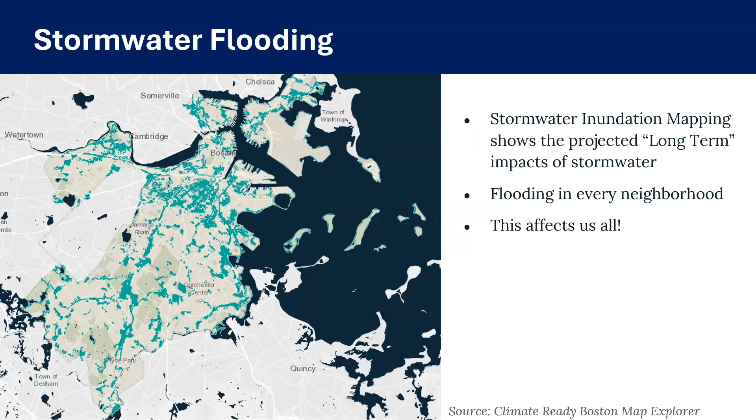So thankfully, we have green infrastructure to help us with some of those water quantity and water quality issues. So for the purposes of this discussion, green infrastructure is described as using plants and soil and other natural materials to capture stormwater and allow it to absorb into the ground. And while that water is absorbing into the ground, plants and soils are removing pollutants and capturing litter, which keeps it out of our receiving waters.

So I'm going to go through a couple of examples of green infrastructure. This is probably a review for a lot of folks on this call, but who doesn't love looking at beautiful pictures? I also should have mentioned at the beginning that the majority of the photos in this presentation were taken in the city of Boston or in Massachusetts. So at the bottom of each image, you'll see the name of the location or the site, the department or entity that either owns the site or is responsible for caring for it, and then the neighborhood in the city of Boston where this site is located.

Okay, so first we have rain gardens and bioswales. These are probably the green infrastructure feature that people are most familiar with. They're typically shallow, depressed areas where water is able to collect and slowly absorb into the ground. They're often planted with native plants, which means that they are providing habitat and a variety of other things. They also can be all kinds of shapes and sizes, which means they're very flexible and can be applied throughout our watersheds.

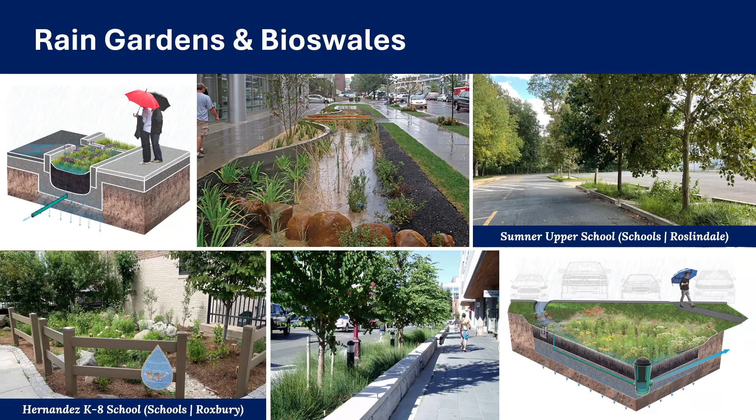We have tree pits and tree infiltration trenches. Many of you have probably walked past or over a tree pit or a tree infiltration trench and not known that that's what it was. At the surface, they look very much like a standard street tree pit. But underground, under the surface, there is a large kind of stone reservoir where water is able to collect and slowly infiltrate into the ground. But additionally, that water is in a location where tree roots can have direct access to it.

The majority of our street trees, especially in developed and urban areas, do not get enough water for them to grow to their natural size or their healthy growth habit that is typical for that species of tree or plant. So having access to additional water helps these trees grow closer to their mature size, and it also gives tree roots access to air underground.

City of New York did a study, probably about 5 or 6 years ago at this point, but they were trying to figure out the primary reason that their street trees were struggling and dying. And everybody assumed that it would be lack of access to water, salt spray or something from the roadway. But it turned out that the biggest issue, the common issue across all of their boroughs, was compaction. So trees were essentially living in small soil volumes that had become very compacted over the years because of people walking through tree pits. And so that lack of access to air was actually choking their tree roots.

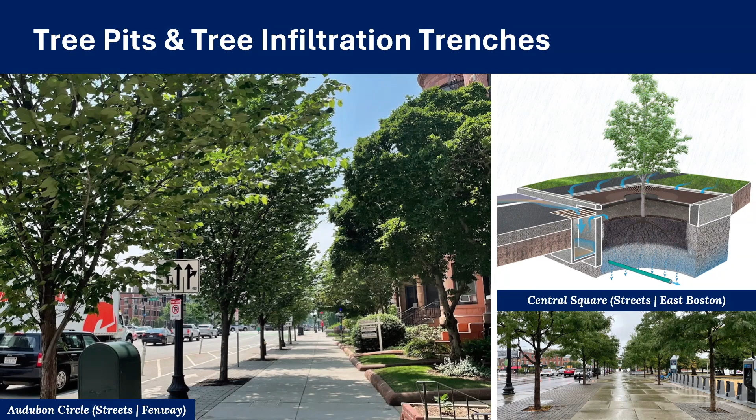We also have green roofs and living walls. Neither of these pictures are taken in Boston or in Massachusetts, unfortunately. The image in the top left shows an apartment building that is becoming more common in Milan, in Italy. The idea here is that regardless of the floor that you live on, the goal is for you to be able to look out your window and feel that you are surrounded by nature and that you're surrounded by trees. So they're building these beautiful buildings that have trees that are planted on various platforms up the building.

And then the image at the bottom is actually from Amsterdam, and this is a lovely example of the green roofs and living walls that they're building across the city to help reduce the amount of stormwater that is reaching the ground and then must be managed by the drainage systems.

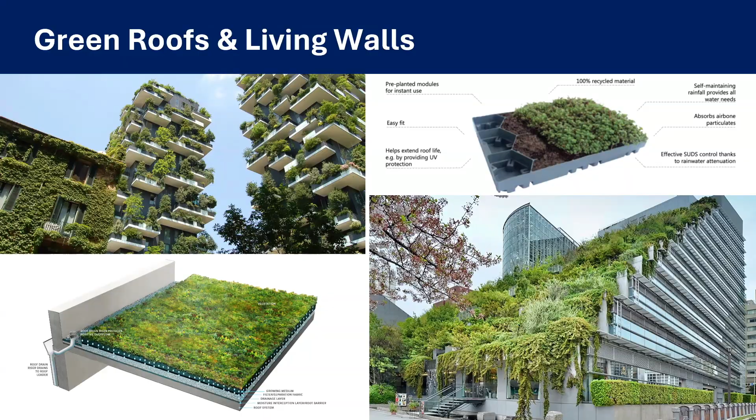We have porous paving materials. There are many different types of porous paving materials. It used to be pretty much porous asphalt was the thing that you would see across parking lots and roadways and other paved surfaces. These materials function very similarly to a standard paving material in that they are ADA compliant and you can drive on them or walk on them or cycle across them or roll across them, but they allow water to pass through them.

The fines in the material have been removed and created voids that water can pass through to absorb into the ground. The same for porous concrete, which you're seeing in the image on the bottom left. But there are also things like porous pavers, which if you are in a green infrastructure project and you're trying to identify which of the pavers are the porous pavers, you can typically tell by finding the little bumps that you might see in between the pavers.

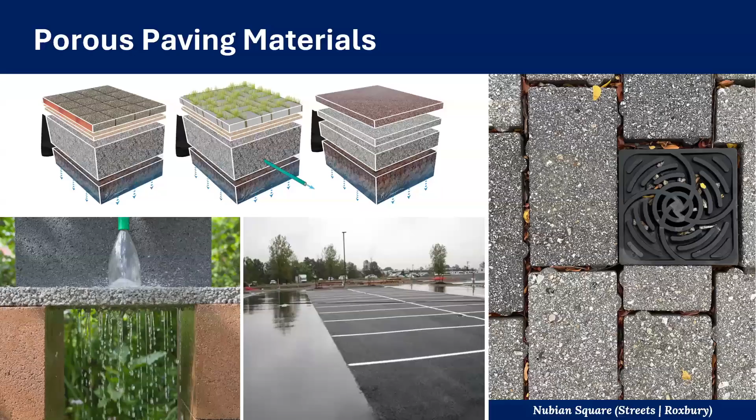Those little separators are there to keep the pavers apart from one another so that water can pass through the voids or the gaps between the pavers and absorb into the ground. Again, ADA compliant materials that are really easily deployed if you have a space where you need some kind of hard surface, but you'd like that surface to be porous.

And the last that I'm going to talk about briefly is constructed wetlands and marshlands. These are exactly what they sound like. They are human-made wetlands and marshlands. They function very similar to a natural system. They can be designed and deployed in even the most dense urban areas. The two images that you're seeing on the screen are built in Dorchester, which is a very heavily developed part of the city of Boston.

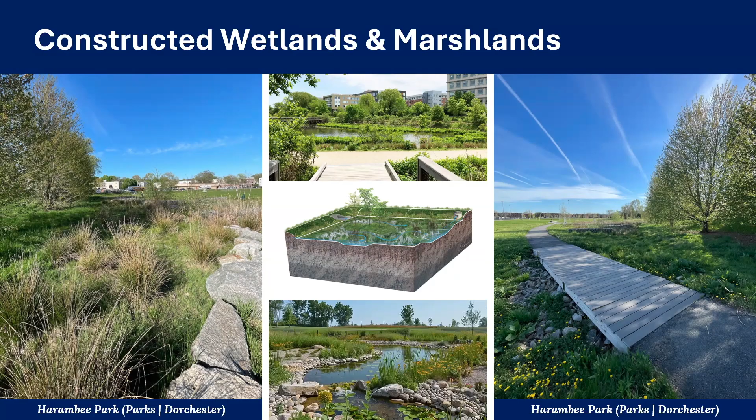And these areas are wonderful because in addition to providing habitat, and just being beautiful to look at, they can manage large drainage areas. So Harambee Park, which you're seeing on the screen right now, has a drainage area of I think 20 or 30 acres that all comes to this individual location. So really wonderful features and really beautiful additions to parkland, schoolyards, and other spaces.

So I've talked a lot about green infrastructure as it relates to stormwater and water quality. But there's all of these wonderful additional co-benefits that green infrastructure features bring with them. I'm not going to read the bulleted list, but for example, I mentioned that green infrastructure features help to support the healthy natural growth of trees. So they help to increase our urban tree canopy, which also leads to cooler cities by reducing our urban heat island effect.

They help to promote biodiversity in urban and developed areas where we often lose that biodiversity as we harden our surfaces. They also can help to reduce energy usage, and they improve human health, both physical and mental health. So they help with air quality issues, as well as providing access to nature, which is something that our human minds need for health and happiness. And there are also wonderful opportunities for environmental education, like this presentation today, but also with some of the signage that you'll see in future projects in this slideshow.

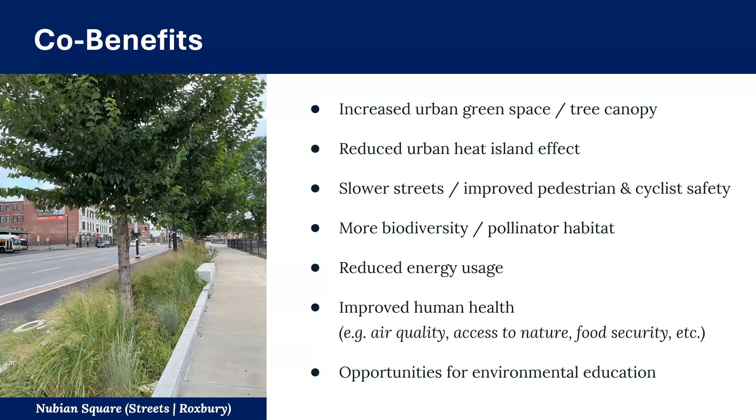Okay, so I'm going to talk briefly about the green infrastructure details and specifications that we assembled at the City of Boston. The reason behind undertaking this effort was that if we want to improve the quality of the design and construction and maintenance of green infrastructure, there's real value added by having everyone in an urban area or in a community using the same designs and specifications to build these features.

It means that your contractors are going to get more comfortable constructing them and maintaining them. It means that your project managers and consultants and engineers and landscape architects are going to get more comfortable designing these features in a way that can be delivered so that they are easily maintainable. So there's a lot of value to having a unified approach to green infrastructure within your community.

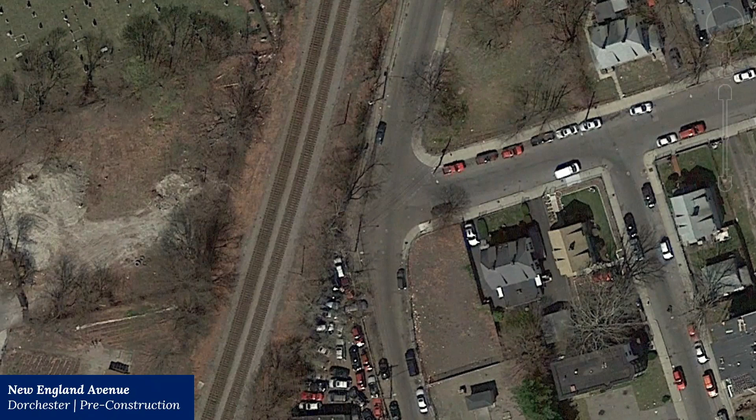They're massive, and basically we were experiencing traffic issues, speed issues. People were flying through this area, and a number of other safety-related issues. So the Boston Transportation Department did a Vision Zero project here, which is a traffic safety program. The idea is to reduce injuries and deaths from traffic accidents to zero.

And so the project resulted in this paint and post installation that you're seeing on the screen. So these are painted lines on the roadway. And there are little flex posts, which are small plastic vertical installations that are encouraging the vehicle drivers to stay within these new painted lines. So as you can see, there's a lot of space that was created here that was no longer intended for vehicles. But the project had these wonderful safety improvements, but people sometimes ignored the new striping and would drive right through those spaces.

And so we saw this as an opportunity to take those newly created negative spaces and turn them into something positive. So this is an image of what the site looks like today. Rather than having just paint and post installation, we took those hatched areas and we converted them into bioretention, rain gardens, and bioswales. I'm going to show you an image really quickly of what it looks like at ground level. But as you can see, the roadway is tightened up.

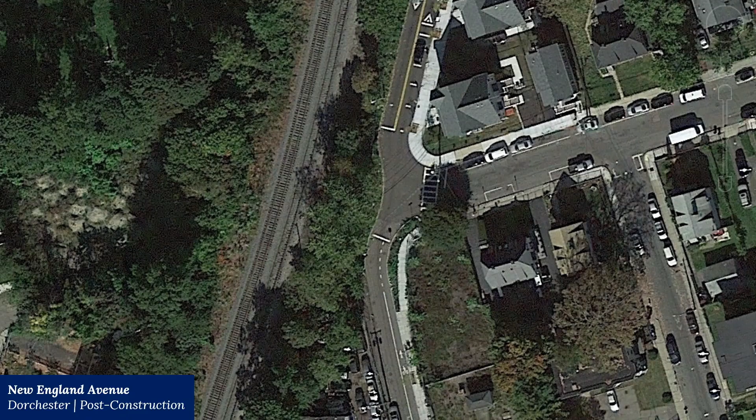The traffic pattern still makes logical sense for the people using it, but the speeds are slower. There is good visibility around crosswalks. The crossings are shorter. And now we have this beautiful added green space that helps to reduce flooding in this area. So this is what it looks like at ground level. It's just some lovely additions to the space that used to be all asphalt area.

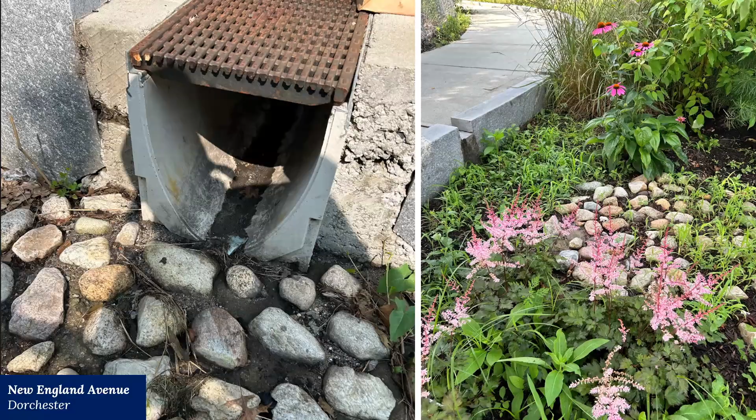So with this goal in mind, making that project and what you just saw the norm, we undertook this long process to create details and specifications for the city of Boston. So we started by having an internal group with representatives from a bunch of different city departments all get together and identify the types of details that we wanted and the types of specifications that would be useful. So we brought together our Disabilities Commission, our Public Works Department, Transportation Department, Parks and Rec, Boston Public Schools, and the Boston Water and Sewer Commission.

So we came up with this list of details and the accompanying specifications. We grouped them into categories. So there's your inlet structures, the point where water is going to enter your feature, your surface materials and other things that would allow water to pass through and also enter into those features if they were subsurface, for example. Our pretreatment measures, structures and things we wanted at the openings or the beginnings of our features to remove some of that sediment and to remove litter and other things, as well as features within the green infrastructure itself that would act as capture points for sediment and other types of litter.

And then we also looked at the different types of elements that we would need to make these features function, to control the flow of water through the features. We have details that are about the overarching look for a bioswale or for a vegetated swale or a rain garden, as well as tree planting related details. And then finally, the outflow or the overflow structures where water ultimately leaves the system if it has not absorbed into the ground.

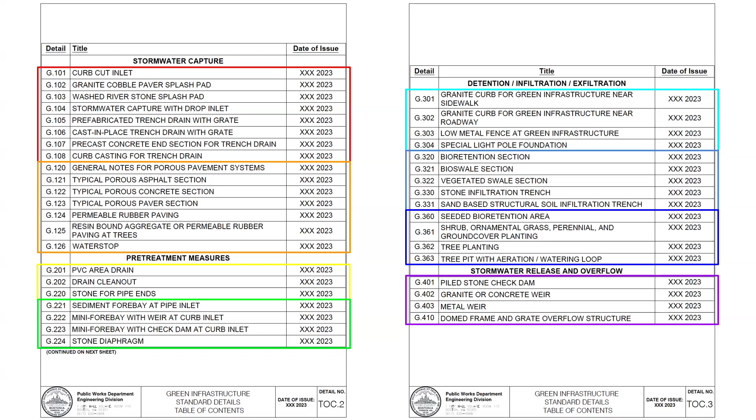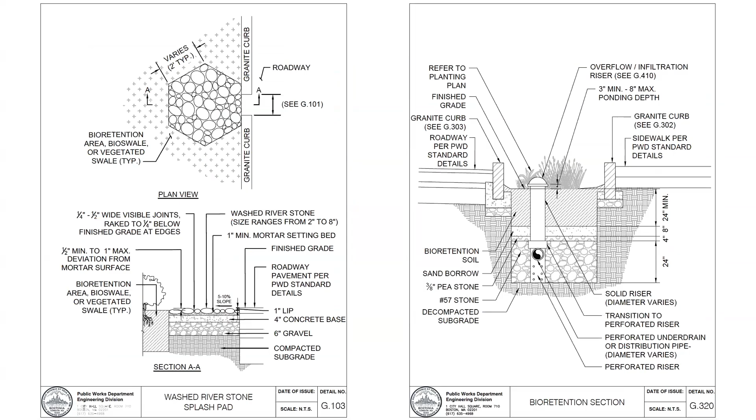So we came up with a number of details. These were pulled from a bunch of different sources. Some of them were from previous projects that we had done, which had all been designed in different ways over the years. And some of them were from other cities, other states, details that we felt were good examples of what we were trying to accomplish in the city. Then we asked everybody to comment on it. So people started marking stuff up and gave us all of their comments.

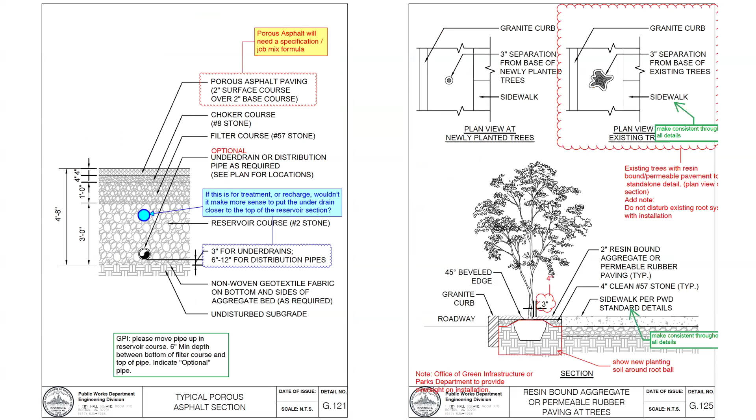So with all the information that we received from all these wonderful folks that were part of this effort, we were able to create this finalized set of details that is now available for use. And we encourage its use, not just for city projects, but also for the public as well. So if you're doing a private project and you're designing a bioswale or a rain garden, here are details that you can use to design and then build it.

We also created supporting resources that go with the details and specifications. So we found out pretty early on that a lot of people were excited about the idea of green infrastructure, but didn't really know how to design things or what they should be designing. And so we created some guidelines. It's somewhat narrative. It helps to guide you through the process of picking a site, deciding which feature you want to use, sizing it, and then picking your plant material.

We also have a plant palette, which includes a number of native plant species that are well adapted to green infrastructure, which means that they can handle being inundated with water for longer periods of time. They can also handle periods of no rain. And because they're native to our area, they are well adjusted to our climate, which means that they don't require extra watering or additional care outside of the standard weather patterns that we're seeing in the city. They also are pretty hardy species for the most part, because urban green infrastructure is not always the kindest environment for plants.

We also have this web page on the City of Boston's website, where you can access all these details, the guidelines, the plant palette, and it's open to the public for use. So this is an example of a public project in Boston. This is a Boston Public Works project. It's a neighborhood safety project.

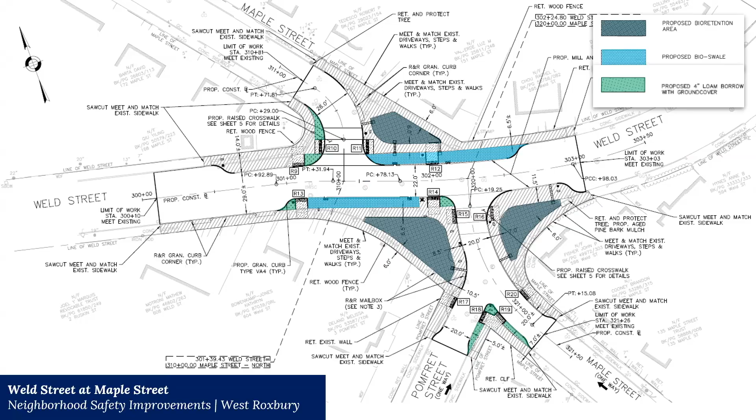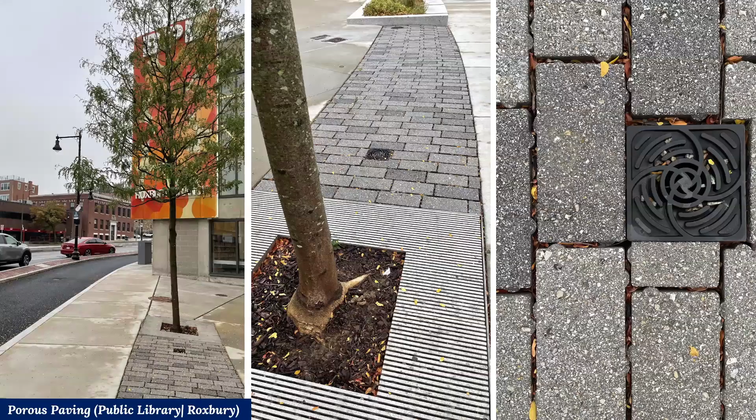This is in front of the Roxbury Public Library. So this is an example of a tree infiltration trench. We used what we think is a nice pattern for pavers to show folks that pavers and area drains can be pretty in addition to functional.

So the space needed to have hard surface because they host farmers markets and events in this space. And so rather than taking all of this area and converting it to a vegetated space, we were able to create this largely subsurface feature that still manages all the stormwater in the area, and then trees that are now growing and will provide shade in the future.

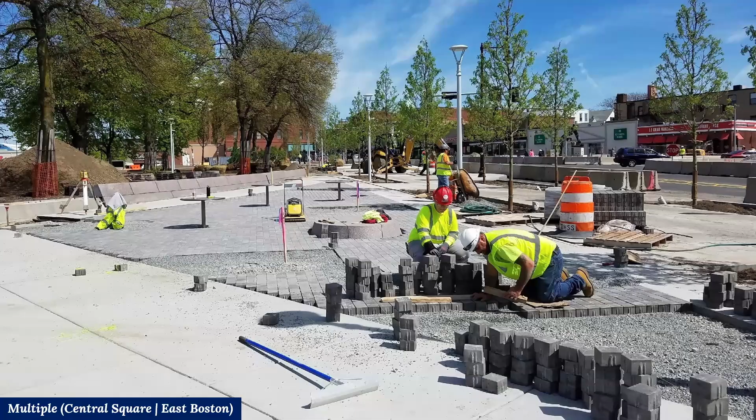This is Central Square over in East Boston. There are a number of different types of green infrastructure in this installation. The folks that you're seeing in the foreground here are laying porous pavers. It's a really large park space. The footprint of the park used to be that oval wall that you're seeing top left of this image. So we were able to expand the park space quite a bit out into what used to be a very confusing roundabout.

And I'm using roundabout loosely because there were, I think, 7 or 8 roads that all come into this intersection. And it was very confusing and very difficult to navigate, and lots of pavement. So we converted this into a porous paver area. There are several of them around the park.

And I want to point your attention to the trees that were planted on the top right. So we created this tree alley, very similar to what you see in Commonwealth Avenue in Boston or in a lot of European cities. So these trees, this is when they were first planted. And the next image that I'm going to show you is the after image, taken about 5 years later. So massive tree growth in just a very short amount of time. This whole area did not have any trees in it 5 years earlier.

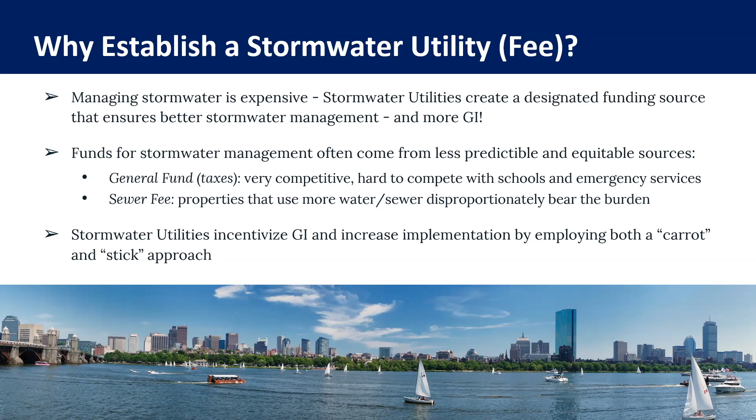So the way that these are typically structured is a stormwater fee is based on the amount of impervious you have. Again, more impervious, higher fee. And your credit program gives you a reduction on your stormwater fee if you are doing an activity that is helping to reduce the amount of stormwater generated, to manage the stormwater that is being generated, and to do some kind of public education around stormwater, all of which are required by our stormwater permits.

We also can have grant programs, and grant programs are funded by the stormwater fee, and they are used to allow property owners to install green infrastructure on their sites. So for example, if you are a faith-based institution and you have a large parking lot, but not a lot of money, you can apply for a grant and install a bioretention area in your parking lot. So the grant program helps to encourage people to do the added thing that helps to manage stormwater. And then you can apply for a credit to reduce your fee because now you have less hard surface on your property.

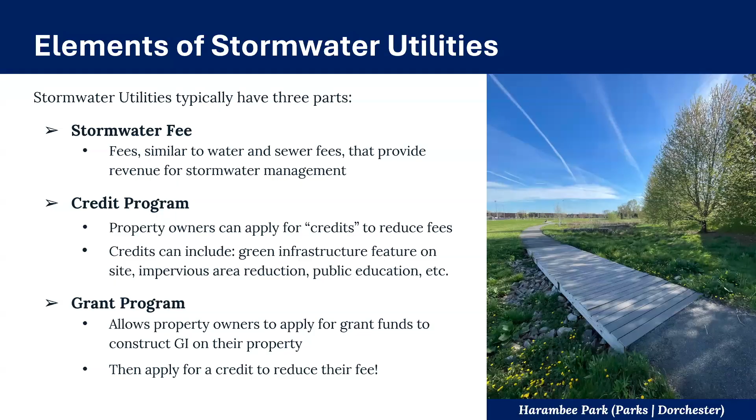So a couple of things, your goals, what you're trying to accomplish should dictate how you structure your stormwater fee. If your goal is just to raise funds, you're going to want a simple defensible fee, maybe a higher fee, and clearly articulated penalties for when you don't pay your fee. Again, this is if all you want to do is raise money so that the city or town can do the stormwater work that needs to be done.

But if you're trying to get assistance from the public, then you're going to want a credit program. You're going to want a lot of different options for people. How can they help to support the city or town's stormwater work and then lower their fee?

And if your goal is to just change behavior across the whole municipality and change the way we all think about stormwater and water quality and green infrastructure, then you're going to want a really generous credit program. Big percentages of your fee can be reduced for doing these activities. And you're going to want a grant program. Here's funding to help you build this kind of stuff on your site. And additionally, you want to create resources and application support so that everybody is able to apply for their credits and to apply for grants so that they can all participate in this work.